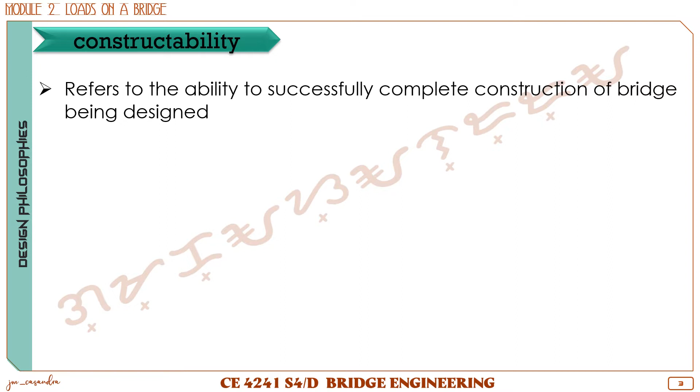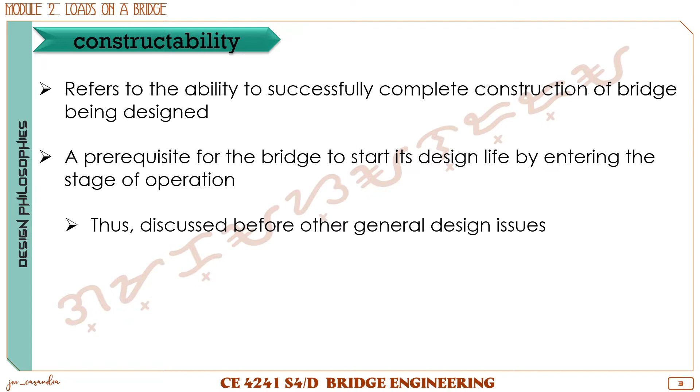The first requirement for bridge design is constructability, which refers to the ability to successfully complete construction of the bridge being designed. It is a prerequisite for the bridge to start its design life by entering the stage of operation, meaning a bridge is constructable if we are able to build the design. Therefore, it is necessary to discuss constructability before the general design issues.

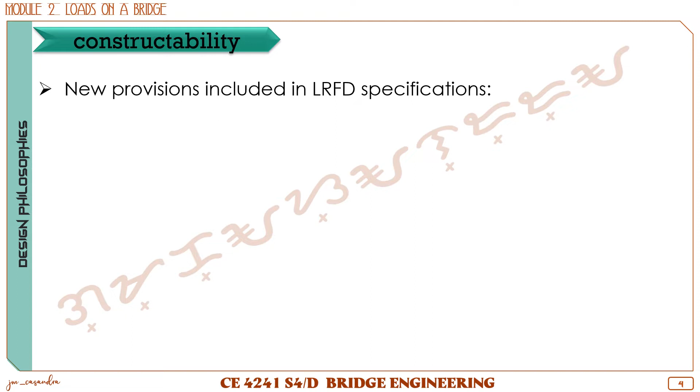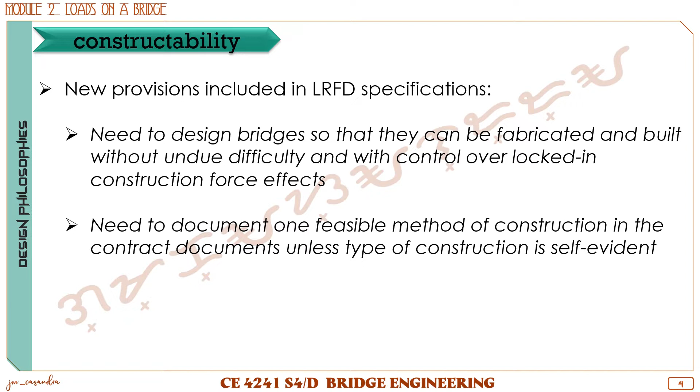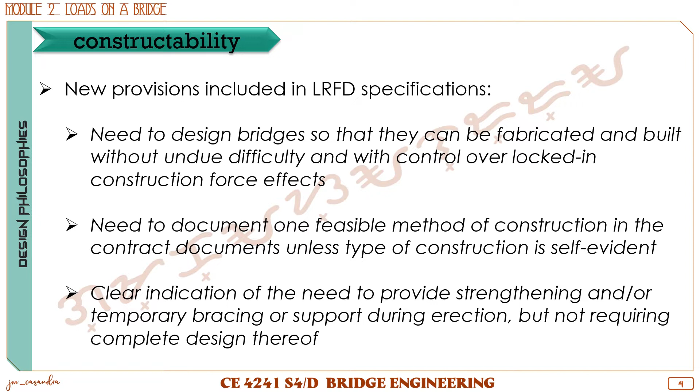Under the new provisions included in the LRFD specifications, there is a need to identify the materials to be used in bridge construction. Likewise, it is required to indicate a clear and feasible method of construction. Whenever there is a need for necessary or additional strengthening, temporary bracing, or support during construction, this should also be indicated in the design specifications before construction starts.

The second requirement or objective for highway bridge design is safety. In any structure or design, an engineer's primary responsibility is public safety. This includes structural survival, wherein the structure should not collapse under a design event.

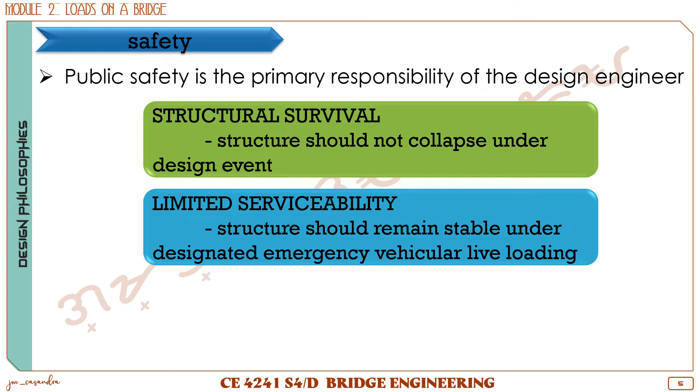Also, the structure should remain stable under designated emergency vehicular live loading, and lastly, the structure design may be reopened to all traffic after inspection following an extreme event. An example of an extreme event would be earthquakes, typhoons, hurricanes, and others.

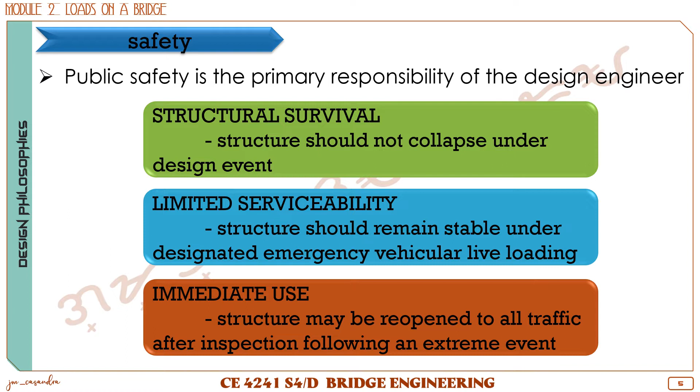In the design of bridges, the specifications given by AASHTO have the purpose of ensuring safety such that minimum resistances would exceed the potential maximum demands or force effects due to various loads during its design life. So we are not only designing the strength of the bridge, but also its safety.

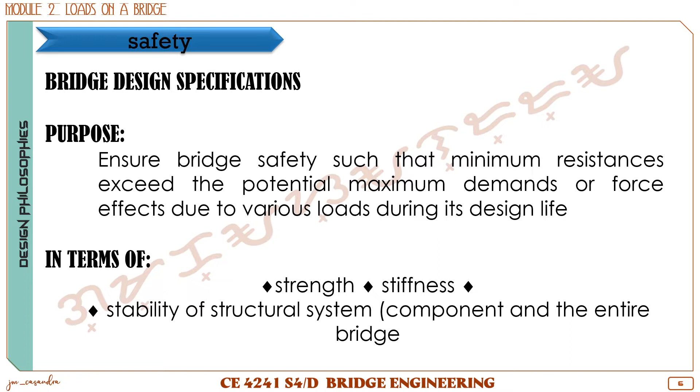The safety and strength of the specifications are measured in terms of the strength, the stiffness, and the stability of the structural system, meaning the stability of the different components of the bridge. We have different design methods that we follow in designing bridges, similar to other methods used for designing different structures. These design methods are also known as the philosophies of safety for bridge design.

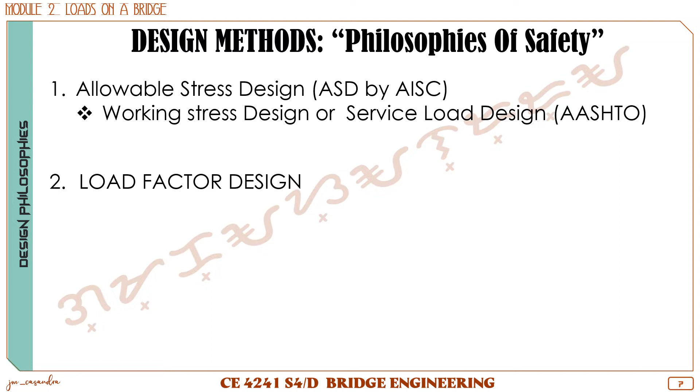This includes allowable stress design or ASD, as called by the AISC, also known as the working stress design or service load design, as called by AASHTO. The second design method or philosophy of safety used for bridge design is the load factor design, also called the ultimate or strength design.

Lastly, we have the load and resistance factor design, which is now the most used design method or safety philosophy for bridge design. This is the design method that we are going to focus on and use throughout the subject.

So we have working stress design or WSD, also known as the allowable stress design or ASD, or the service load design by AASHTO. The working stress design is limited to recognizing only some loads as being more variable than others; it does not recognize this variability fully.

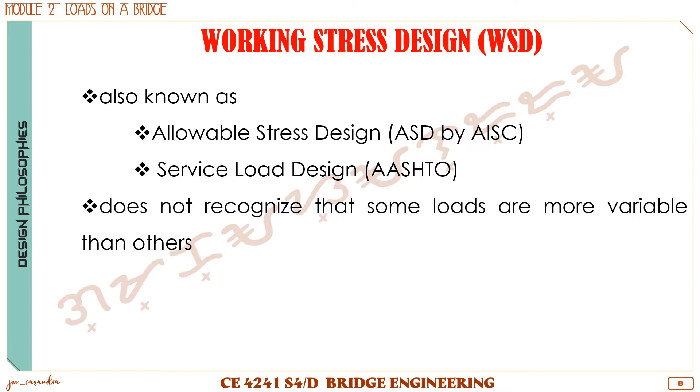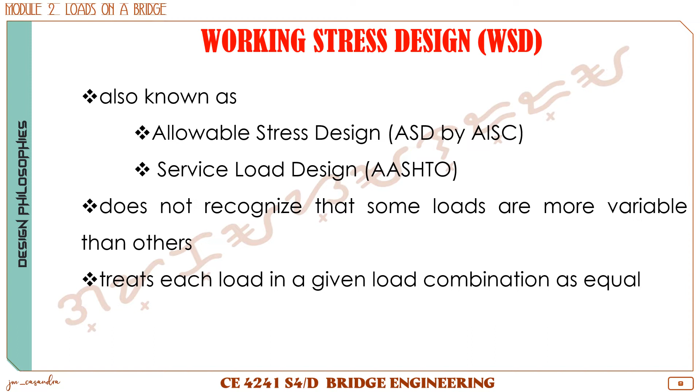That means in the working stress design, we assume that more or less all of the loads experienced by the bridge would not vary from each other, or will have the same effects on the bridge. It treats each load in a given load combination as equal.

The basic concept in working stress design is that the maximum applied stress in any structural component would not exceed a certain allowable stress under normal service or working conditions. This is based on the premise that one or more factors of safety can be established based primarily on experience and judgment that will assure safety of a bridge component over its design life.

So it's more of a practical design method. It does not consider the probabilities of failure based on different load combinations.

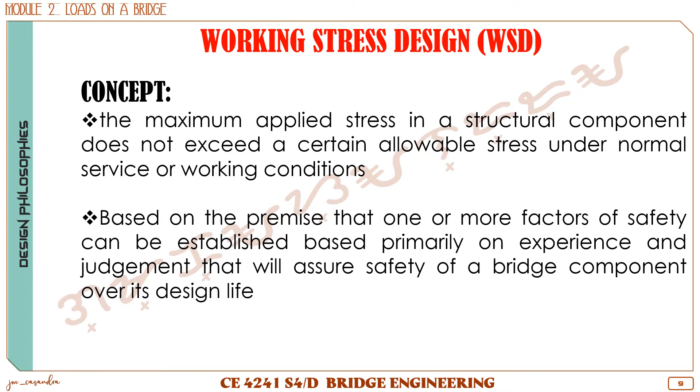The equation for sufficiency in working stress design follows that the sum of the Qi, or the loads, should be less than or equal to the ratio of R, the resistance, over the factor of safety. So Qi is the load, R is your elastic resistance, and Fs is your factor of safety.

So ganito lang kadali si working stress design. Summation lang siya ng loads and we compare it to the ratio of the resistance and the factor of safety. Kasi we are assuming that all loads are equal and

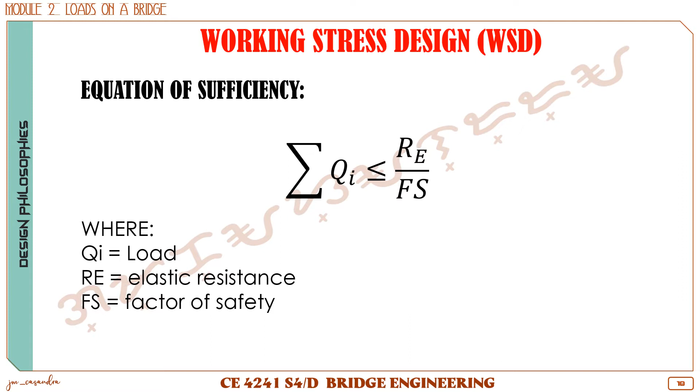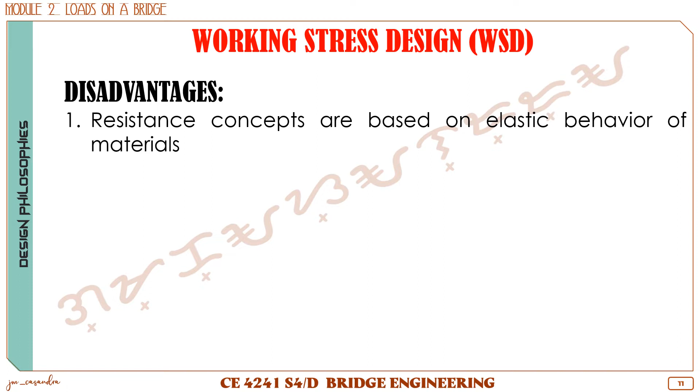non-variant. Okay? So what are the disadvantages of using the WSD? One is that resistance concepts are based on elastic behavior of the material used. It does not embody reasonable measure of strength, which is a more fundamental measure of resistance

allowable stress. So safety factor is applied only to the resistance and loads are considered to be deterministic, meaning walang variation. All loads are the same. And lastly, selection of safety factor is subjective.

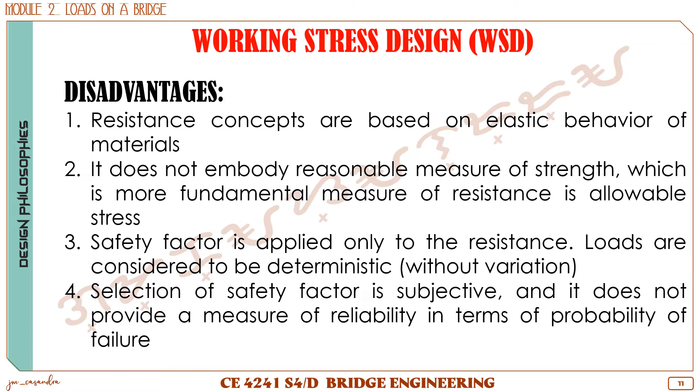It does not provide a measure of reliability in terms of probability of failure. So, with this, hindi masyado nang ginagamit ang working stress design as there are no variations or it does not consider variations in effects of loads and the load combination.

Next, we have the load factor design or LFD, also known as the ultimate design by older ACI code and the strength design by ACI and AASHTO specifications. Basic concept of LFD is that it recognizes that the live loads, specifically vehicular loads and the wind forces, is more variable than the dead load.

So in here, it considers now that there could be variances in the vehicle loading that would pass through our bridges.

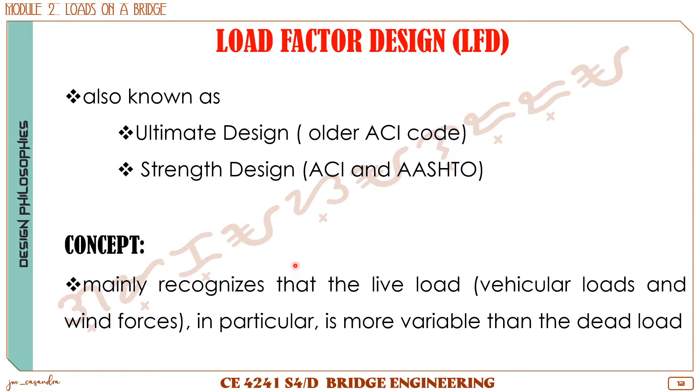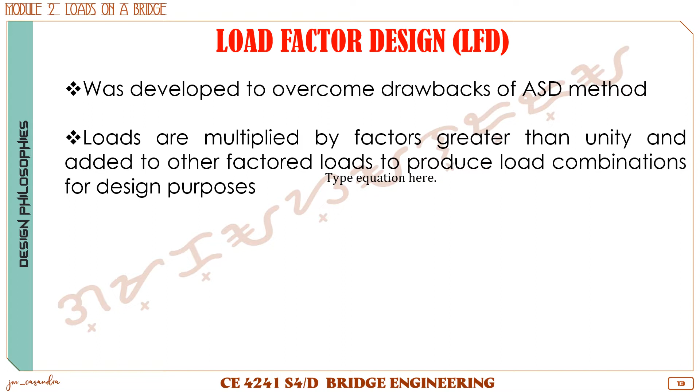The load factor design or the LFD was developed in order to overcome the disadvantages of the WSD method. So in LFD, we now multiply the different loads by factors greater than 1, and these factored loads are added together in order to produce different load combinations for the design purposes.

The equation of sufficiency, or the safety criterion for load factor design, is given by the equation: the summation of the factored load is less than or equal to phi times R, wherein we have gamma as our load factor, Q is the load, R will be your resistance, and phi is the strength reduction factor. So the product of your gamma and Q will be your factored loads.

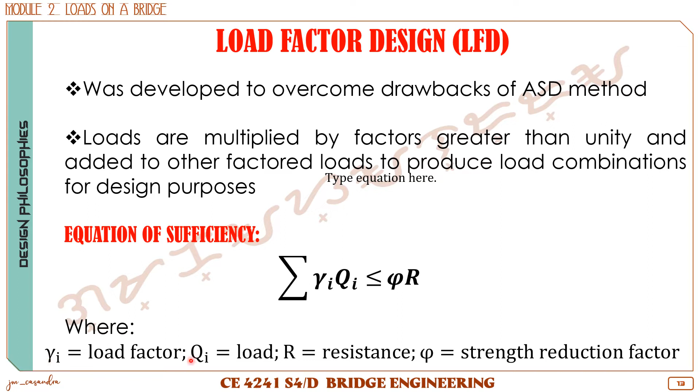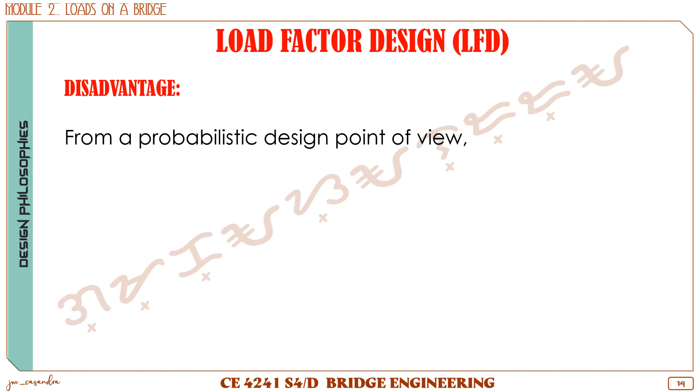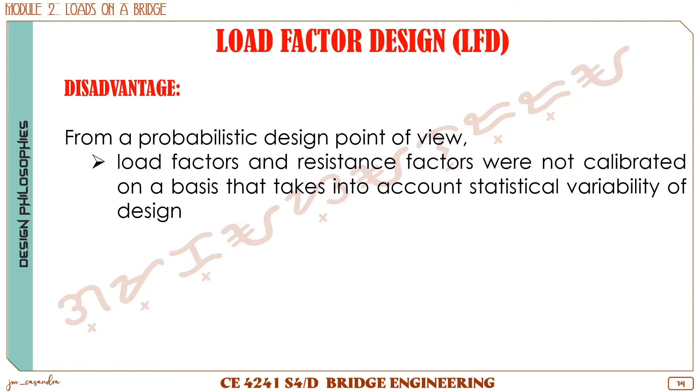So the disadvantages of the load factor design would be based on a probability point of view. It means that the load factors and resistance factors were not calibrated on the basis that takes into account statistical variability of design.

So next we have the load and resistance factor design, the LRFD, which is a design methodology where applicable failure and serviceability conditions are evaluated considering the uncertainties associated with the loads by using load factors, and material resistances by considering resistance factors.

Okay, so in here, we consider now all possibilities of combinations and effects of loads based on the materials as well.

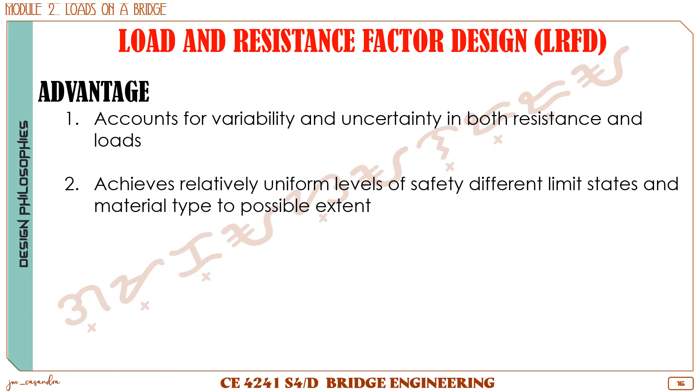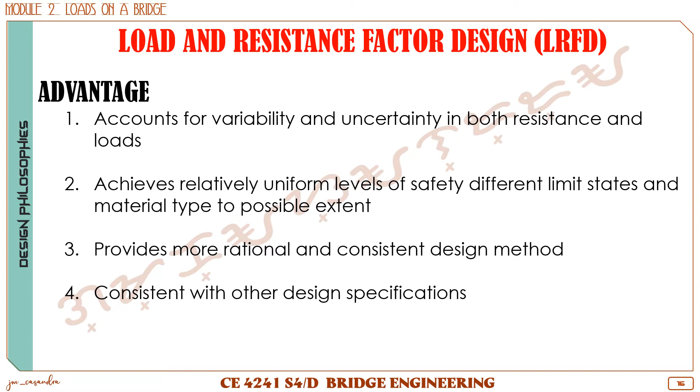Advantages of LRFD would include accounting for variability and uncertainty in both resistance and loads, and would achieve relatively uniform levels of safety that is different for each limit state and material type to possible extent. It would provide more rational and consistent design method for any structure, and it would be consistent with other design specifications that we use for bridge design and other structures.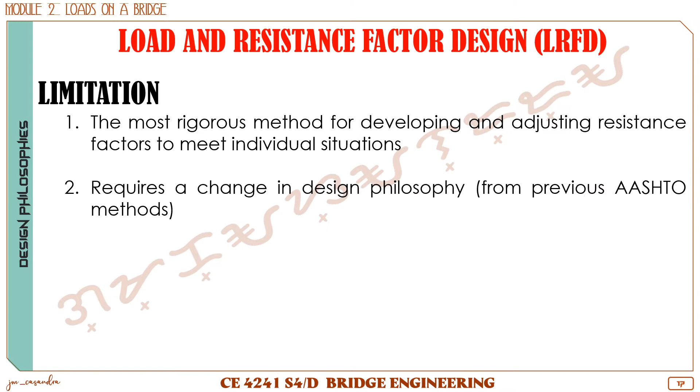Limitations of LRFD would include that it is one of the most rigorous methods for developing and adjusting resistance factors so as to meet individual situations. It would require a change in the design philosophy from previous AASHTO methods, and it requires understanding of the basic concepts of probability and statistics.

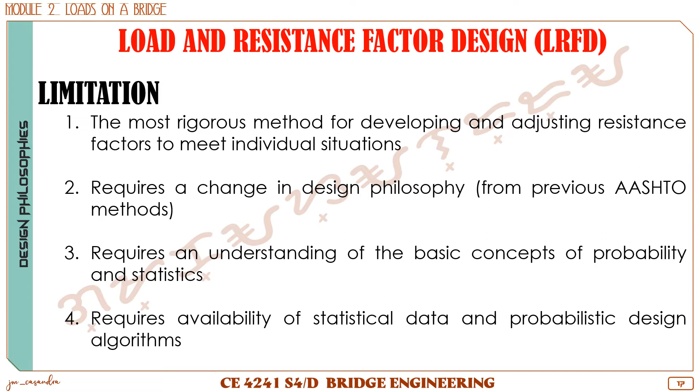It requires availability of the statistical data and probabilistic design algorithms.

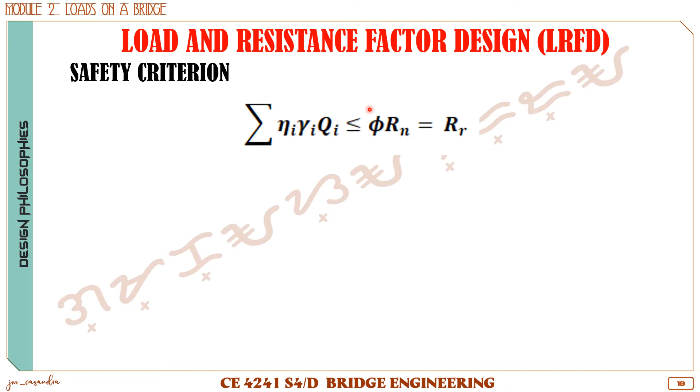So the safety criterion, or the efficiency equation for sufficiency that we use for LRFD, is given by the equation that the sum of the products of the modifier, the load factor, and the load is less than or equal to phi Rn, wherein phi Rn is equal to R sub R. So this equation now gives us

gamma, which is the load factor, which is a statistically based multiplier applied to the force effects present on the structure. We also have your eta, which is the load modifier, which will be classified or categorized as the ductility, redundancy, and operational importance. So QI will be our force effect or the load on the structure.

phi is your resistance factor, which is a statistically based multiplier, which will be applied to the nominal resistance R sub n, wherein the product of phi and R sub n will be our factored resistance. So this equation now is the AASHTO LRFD equation.

So for the load modifier eta, we'll have different values depending on the value of your load factor. So for maximum values of the load factor gamma, the load modifier will now be equivalent to the product of the load modifier for ductility, redundancy, and operational importance, and it will be greater than or equal to 0.95.

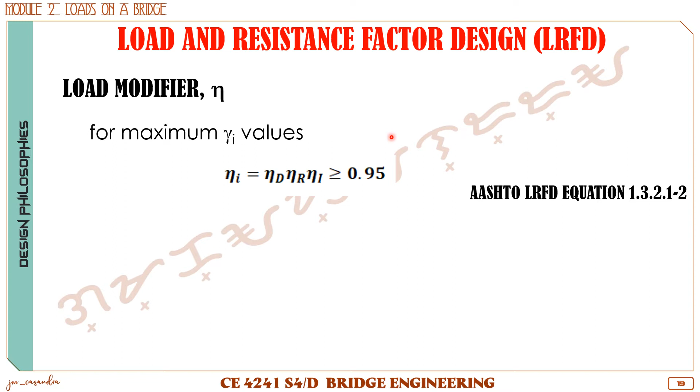While if you're going to use the minimum value for the load factor, the load modifier now will be computed as the reciprocal of the products of the individual load modifiers for ductility, redundancy, and operational importance, which will be less than or equal to 1.

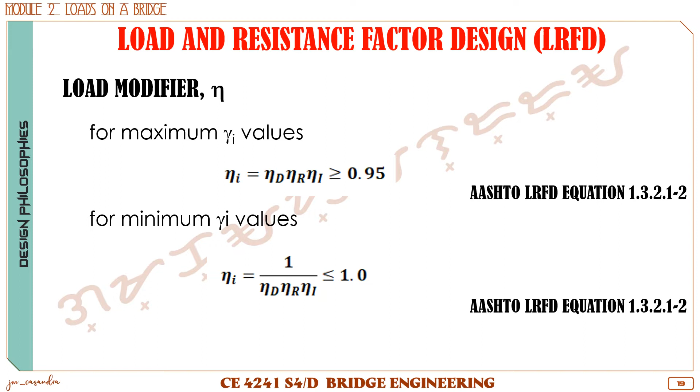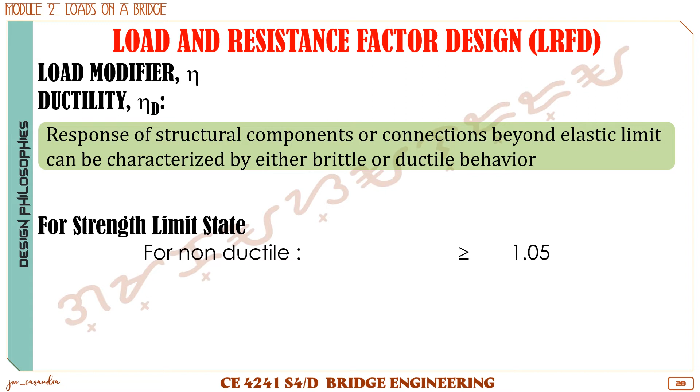So the load modifier for ductility, eta sub D, is the response of structural components or connections beyond its elastic limit. This will be characterized by the brittleness or ductile behavior of the material. Under the strength limit state, for non-ductile materials, we have a value of eta sub D greater than or equal to 1.05. For conventional designs, we have the value equal to 1.

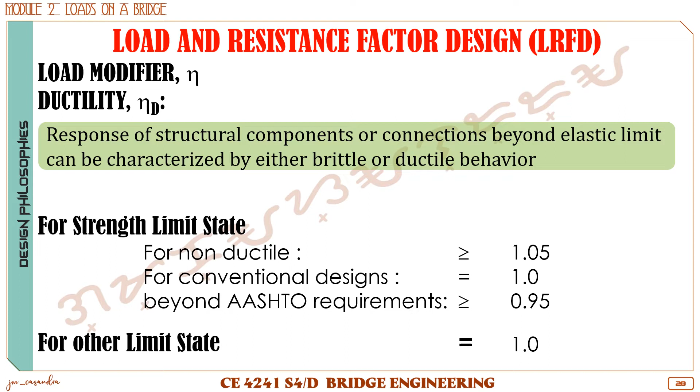And for components or connections that are beyond the AASHTO requirements, the value now will be greater than or equal to 0.95. While for other limit states, like your service, strength, fatigue, and extreme events, the value for the ductility load modifier will be equal to 1.

So for the redundancy load modifier, eta sub R, we know that redundancy has a significant effect on the margin or safety margin of a bridge structure. We also know that a statistically indeterminate structure is considered redundant when more restraints are present than is required in order to satisfy equilibrium.

For strength limit state, for non-redundant members, we will be using a load modifier, eta sub R, greater than or equal to 1.05. For conventional redundancy levels, we have the redundancy load modifier equal to 1. For exceptional redundancy levels, it will have eta sub R greater than or equal to 0.95. While for other limit states, we'll now have a value of the redundancy load modifier equal to 1.

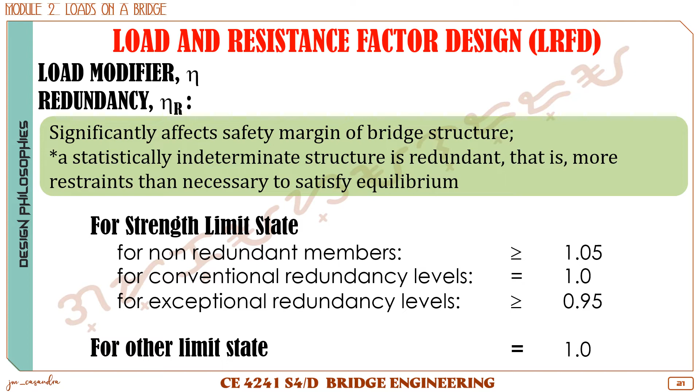For operational importance, eta sub I, a bridge will be classified as operationally important when it has the shortest path between important land uses. This would include residential areas, hospitals, schools, or a bridge would be operationally important if it provides access for police, fire, and rescue vehicles between residents, businesses, and industrial plants.

So for strength limit state, the load modifier eta sub I will be greater than or equal to 1.05 if the bridge is of operational importance. For typical bridges, eta sub I will be equal to 1, and for relatively less important bridges, we have the limit at 0.95. For other limit states, the value of eta sub I will now be equal to 1.

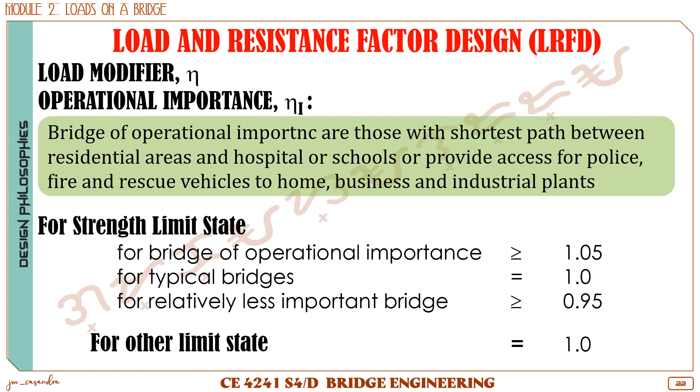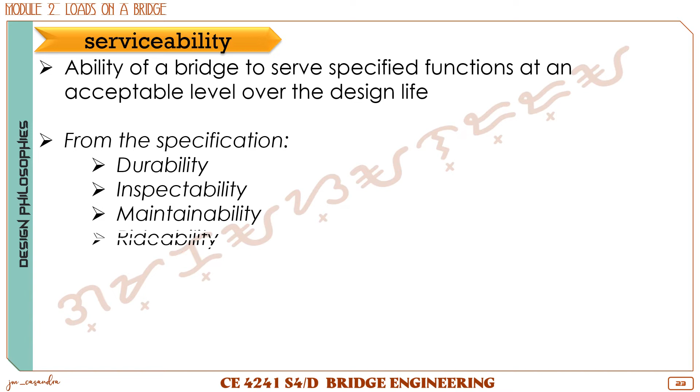So the next requirement for bridge design would be the serviceability of a bridge. Serviceability is defined as the ability of a bridge to serve specified functions at an acceptable level over its design life. From the specifications, serviceability will be defined by the following parameters: durability, inspectability, maintainability, rideability, control deformation, facilitating utilities, and allowance for future widening.

So when we define durability, it means that the material used for our bridge, or in our design, should be able to withstand or resist loads or other factors that could affect the strength of the design. In that case, in contract documents, it should be specified what materials we are going to use, and those materials should be of high quality and able to resist moisture content or salt attack from the different locations where the bridge will be built.

For example, bridges that are built to span over bodies of water - the piers there would be subjected to moisture content because of the water. And if the obstacle is a coastal area, then there will be possible attack from salt compounds. Therefore, the materials used for that bridge should be able to withstand these effects.

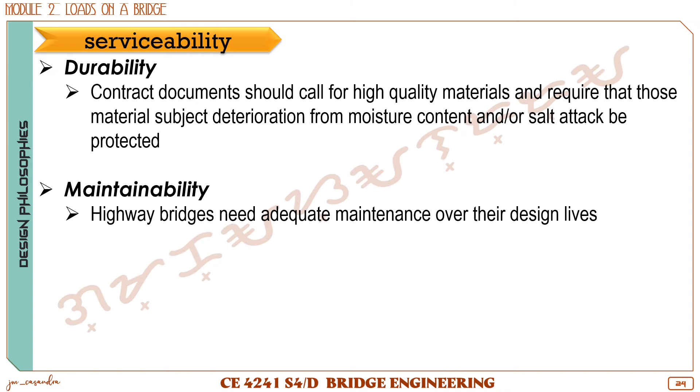So next we have maintainability. It simply means that the bridge design, or your bridge, should allow maintenance during its service life or design life. With that, the maintenance of the bridge should not stop the traffic flow of the vehicles that will use our highway bridges.

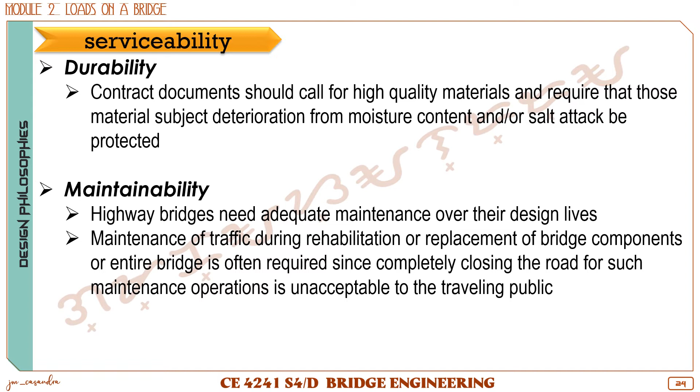So from our discussion in the introduction, bridges are key components of the transportation system. That means when the bridge fails or the bridge closes, our transportation system closes or fails as well, and we do not like that. So in maintaining our bridges, even when we are maintaining, rehabilitating, or fixing the bridge, the traffic flow should still continue, even if not at full capacity - there should still be some operation of traffic flow, because it would be unacceptable for bridge users and highway users when transportation stops, as it would affect their livelihoods, the economy, and other factors.

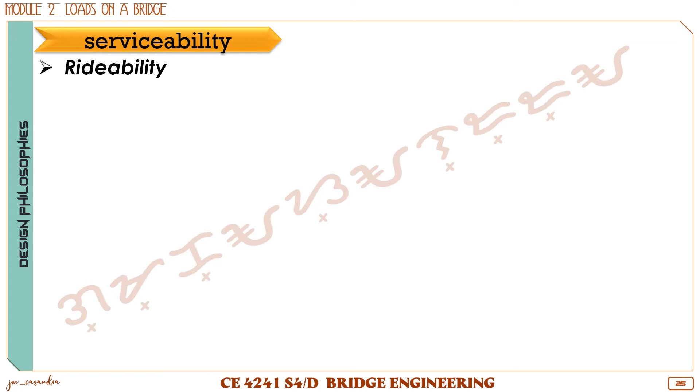So next, we have rideability. So when we say rideability, is our experience using the bridge good? When we ride our vehicles and use the bridge, is our transportation comfortable? The rideability would basically be relevant to the bridge deck, since the bridge deck is that component that provides us the surface for traveling. So our deck should be designed for smooth movement of vehicle traffic. Aside from the smooth flow of traffic, the person passing through the bridge should also feel safe when using our bridge surface.

So next we have facilitating utility. In the construction and design of our bridges, we have to take into consideration the bridge being able to support and maintain conveyance for utilities. Meaning, our bridge should be able to provide spaces for utilities such as utility pipes. This could include pipes for water flow, electrical wirings, communications, and others.

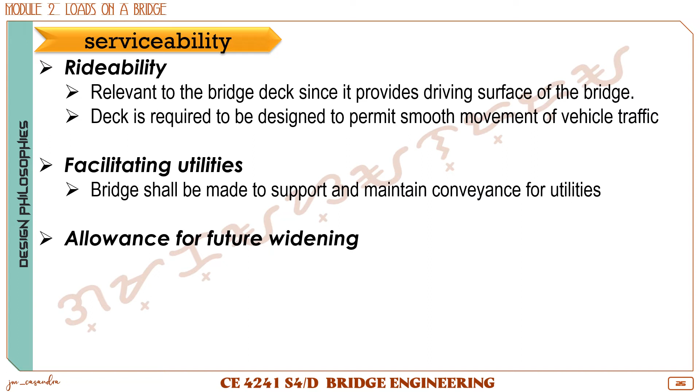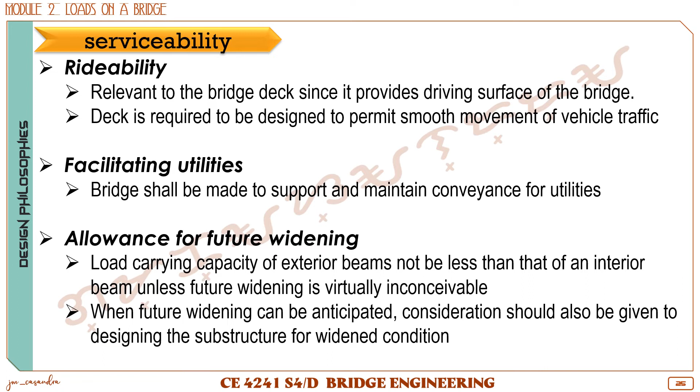Next, we have allowance for future widening. In our design, we have to take into consideration that there is a probability of increase in traffic flow, which means there is a need to increase our carriage width for our bridges. So the capacity of your exterior beams should not be lesser compared to the interior beams, unless we are certain that widening is inconceivable or impossible for our bridge site. In widening, we also have to consider our design for the substructure, since it should also be able to carry that future widening load. So future widening is affected by the possible increase of traffic flow or transportation factors. And lastly, we have controlled deformation.

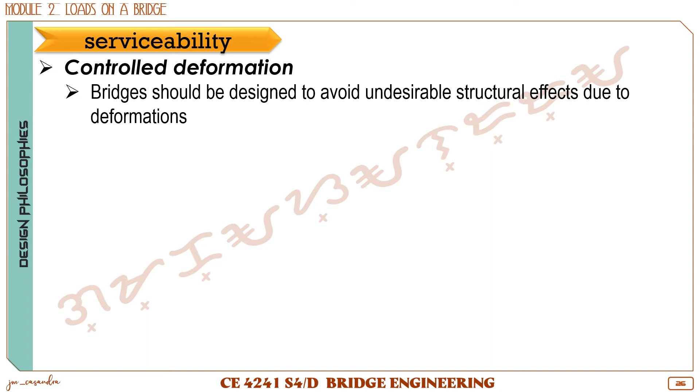For deformation, this would basically be in terms of the deflection of your bridges. In your design, we should avoid structural deformations. When there would be a large deflection on the bridges, what would happen? When you pass through the bridge, you will experience some vibrations. When you feel that deflection, that vibration while passing through your bridge, you'll feel uncomfortable, you'll feel unsafe. So we want to avoid that by controlling the deformation of our bridges in our design. There is no specific deflection limit given by AASHTO, but there are recommended deflection limits based on the material used in our design, specifically for steel, aluminum, and concrete structures.

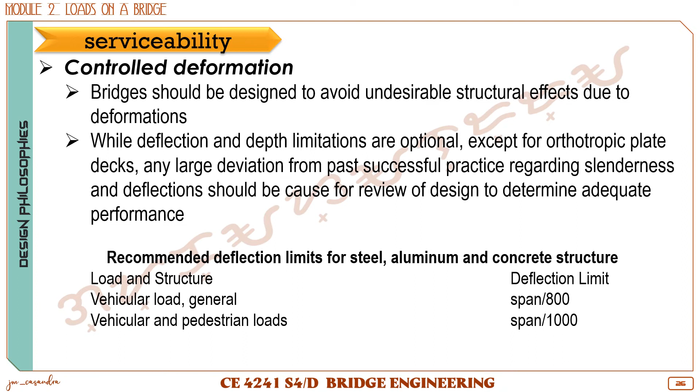In our bridge design, we have to also consider the issue of inspectability. The bridge should be open to inspections, and that would usually happen at specific times, like after extreme events such as storms or earthquakes. We do this to be assured that the bridge was able to withstand those loads or extreme loads, and to check if the bridge is able to cope up with the continuous use of vehicles.

So in inspectability, we should also consider that we can permit inspectors a view of the parts of the structure required for inspection and maintenance, specifically the important structural components. AASHTO specifications also require inspection ladders, walkways, catwalks, covered access holes, and lightings to permit these inspections. But if this cannot be provided, there are other ways to inspect the bridge itself. When practical, these specifications would also require access to permit manual or visual inspection of components, such as headroom in box sections for box cell type components of the bridge.

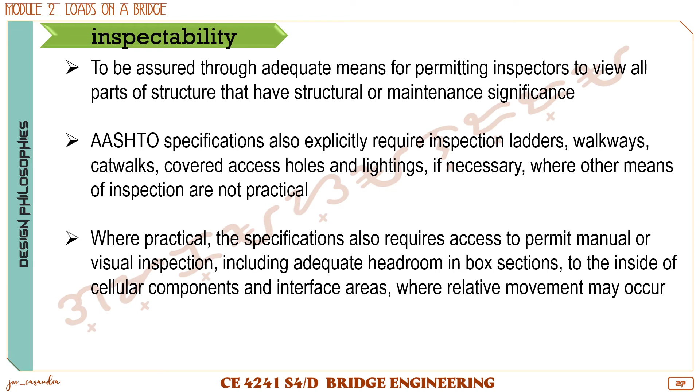So for inspectability, what we basically want is to be able to inspect, see, and check the bridge at random times and during or after extreme events. We should be able to check the conditions of the bridge, so we should have access, and if it's not possible, there should be some ways to see the parts that are structurally important and significant for maintenance.

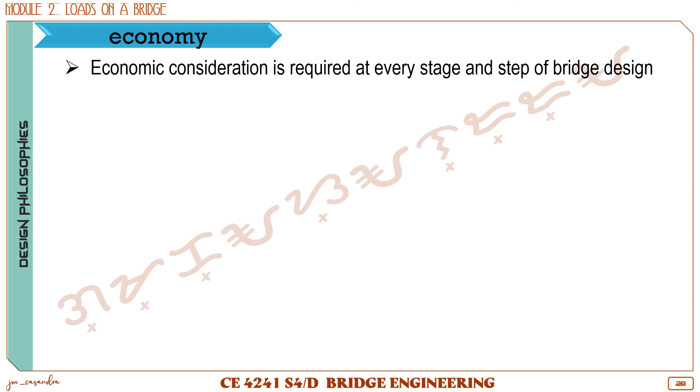So next we have economy. The economic consideration is required at every stage and step of bridge design. The budget is always an important factor in designing and constructing your bridges. From the start of our preliminary design, we have to take into account the budget for the location, the dimensions of the members, and the amount of reinforcement for our concrete components. The location matters—the land there can be expensive.

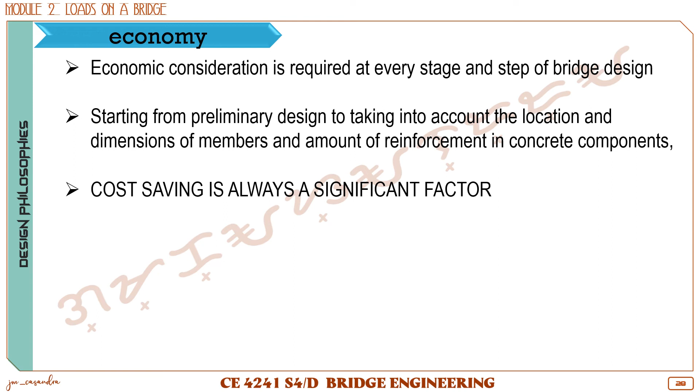So you have to consider those in your design. It's not enough that the design is strong, it should also be economic-wise. Cost saving is always a significant factor when designing bridges and structures. So it's not just about being safe, it should also be cost-efficient. But it shouldn't be that you save cost while sacrificing good design either. It can't be like that, so they should come hand in hand: safe design and economic design.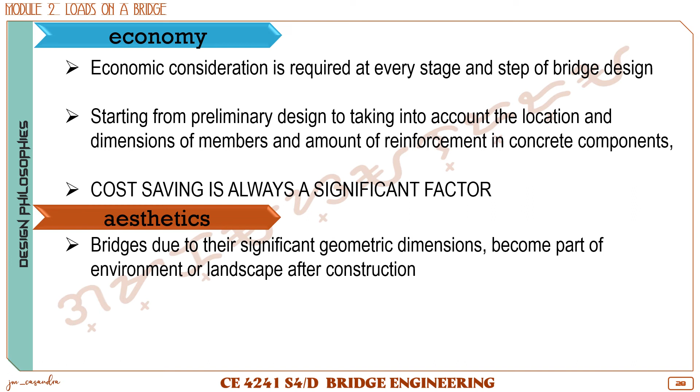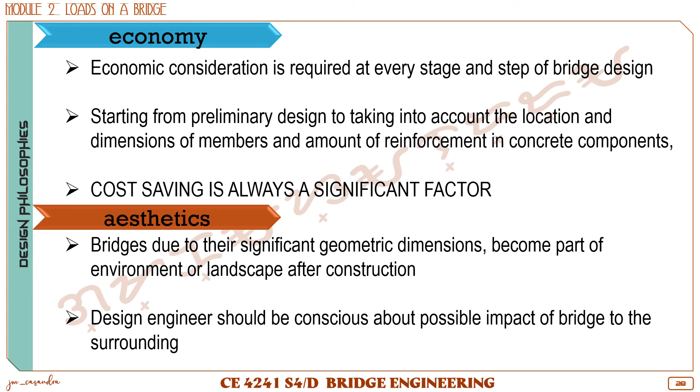Next, we also have to take into consideration the aesthetics of the bridge. Since bridges are usually of significant dimensions, large and long, they become an integral part of the environment or landscape of the surrounding area after construction. Some bridges built in different locations have become landmarks because of their aesthetics and how they contribute to the view or look of the area. As design engineers, we should be conscious about the impact of the bridge on our environment.

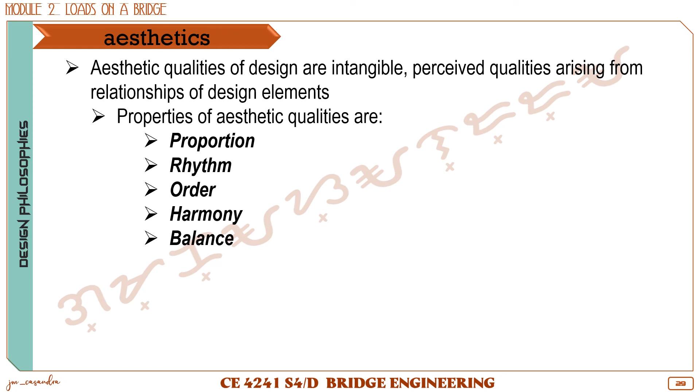Under aesthetics, we now apply the qualities of design which are intangible and perceived qualities that arise from the relationships of the different design elements. The aesthetic qualities we have to consider in bridge design are proportion, rhythm, order, harmony, balance, contrast, scale, and unity, wherein all of these properties are basic elements of design composition that are common to all fine arts and architectural design.

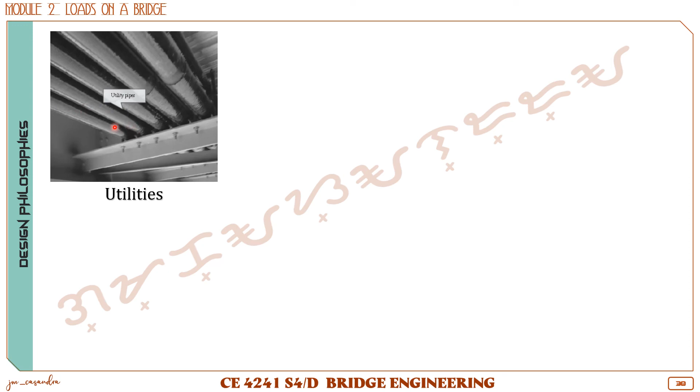So for the serviceability of bridges, accommodating or facilitating utilities for bridges, we have to consider that the bridge would be able to provide access or good space for utility pipes, for example water, drainage, sewage, and others.

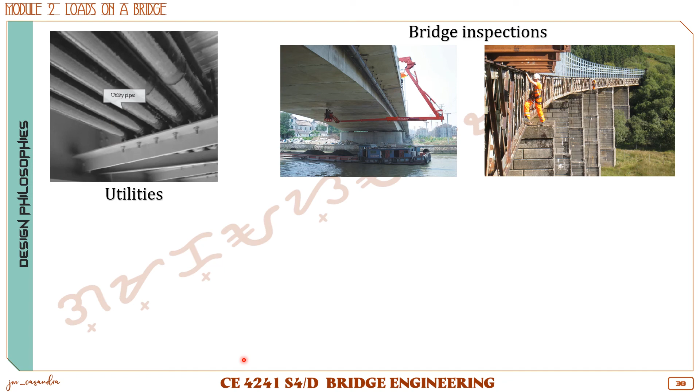Aside from this, sidewalks would also be a great access for inspections of the bridge. Some bridges have walkways for pedestrians and some have a separate walkway for inspections. Some bridges have doors at the bottom of some of their piers, wherein that door leads to ladders that go to some portions of the bridge for inspection. In others, they place a ladder here, and then there's a walkway underneath to inspect the utility pipes, for example.

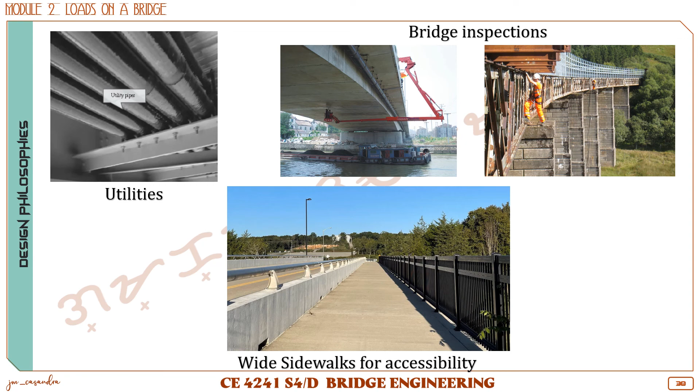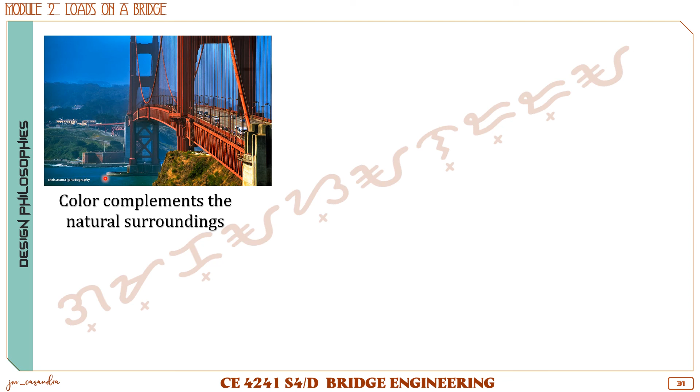In terms of aesthetics, this bridge complements the natural green scenery of the environment. The red color complements the green and blue scenery of the mountains and the water.

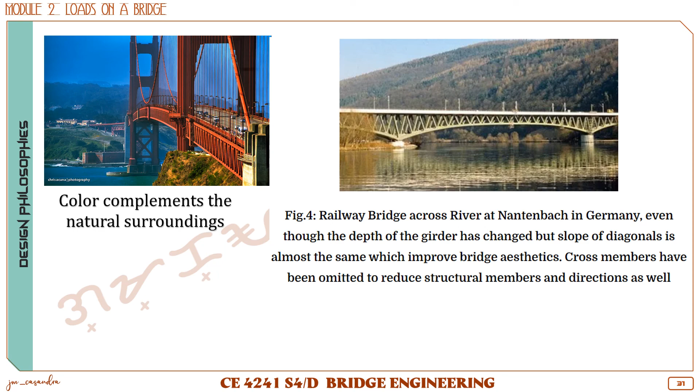This is another bridge that has become a landmark or a part of the area. It demonstrates order and rhythm in the aesthetic part of the bridge design. It goes well with the presence of the creek here, it doesn't ruin the view or the flow of the creek.

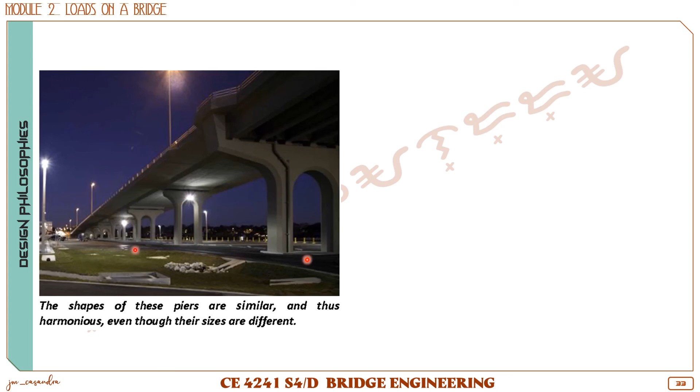Here we have uniformity. Even though the sizes of our piers differ, it still looks good as the shape of the piers looks similar, they all have arches in between. That's uniformity.

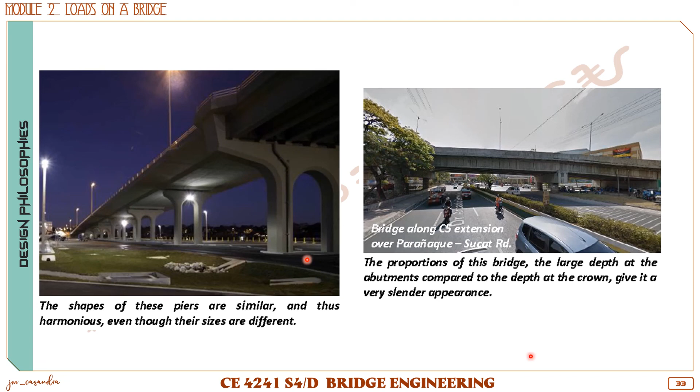Next, this would be a bridge, a very big bridge, but when you look at it, it's not that big in the picture, since when we look at the abutment here, it's large compared to the pier in the middle. So it gives a slender appearance to the bridge.

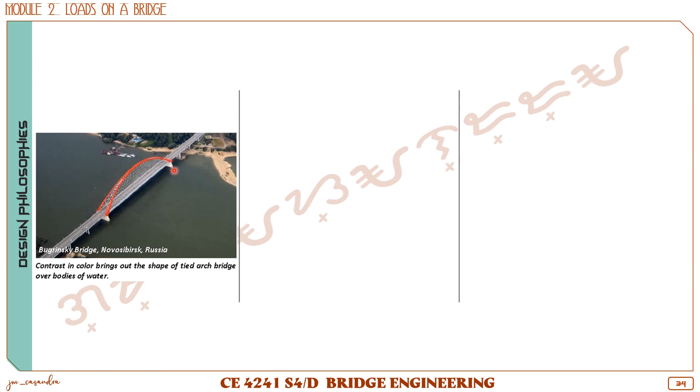Next we have contrast. The surroundings are dark, and then the color of the arch brings out the shape of the arch bridge, which is in contrast to the given surroundings.

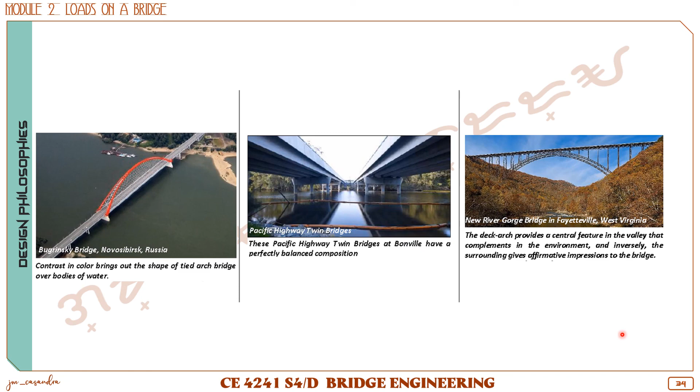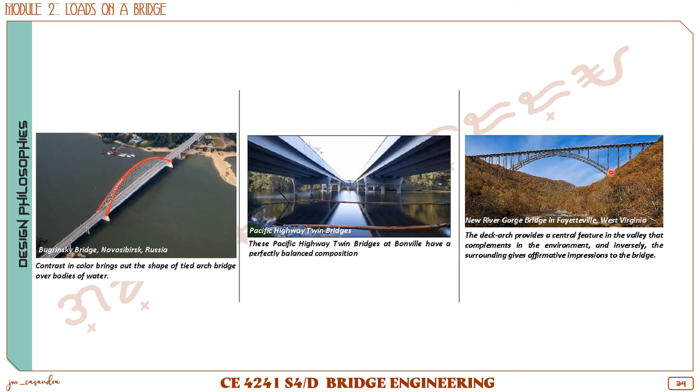And lastly, we have this bridge. The arch of the bridge gives a good impression on the valley of this location.